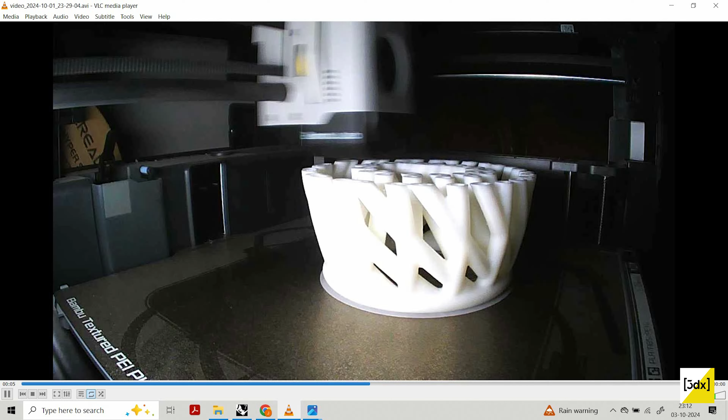In this video we are going to see how to make the structure which I 3D printed using a Bambu Lab 3D printer, which is really good. I tried it, this was my first time using this printer. It was my friend's printer, so I just tried to use it, and you can see the blade as it is, you can see the printing process time lapse. It's just a 10 second time lapse, but the quality is really good.

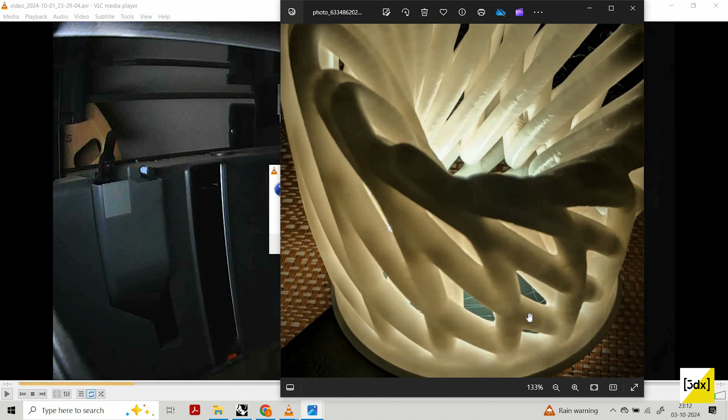So we are going to see how to make this structure in Rhino as well as Grasshopper. You can see in this model, in this photo, the curves have been interlocked. I mean the meshes have been interconnected. So we are going to see, there's a lot of ways to do it.

So in this one way we are going to see, we are going to create a structure in Rhino, and then extract the curve from the structure, then create a mesh for the curve. But instead of creating this mesh, we are going to use a plugin. You just need to go to Food4Rhino, and download this plugin called Chromodoris. This is a plugin which allows you to do ISO surfacing. ISO surfacing is a major use of this plugin, which I will show in the process of making this model, because if I just explain it in words, I think it's very difficult to understand.

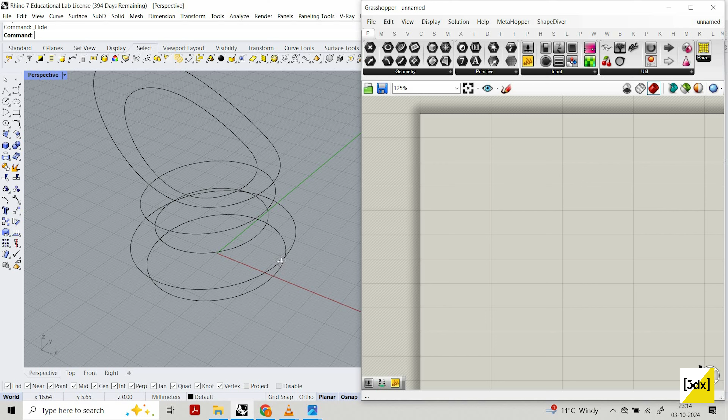So I created the curves because I recorded this video a lot of times, and it got messed up in between due to a lot of reasons. So I just keep this curve like this, and now I'm going to use this curve to create a loft.

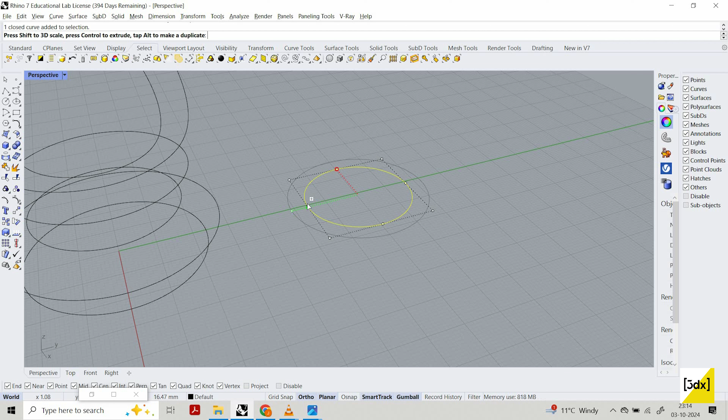Okay, if you don't know how to make this, it's so simple. Take a circle, create a curve - I mean curve is called circle - and then use Shift plus Alt, which allows you to scale, as well as Shift allows you to scale in both axes, and Alt gives a copy of it, and then you can move it. So these four circles you can do easily.

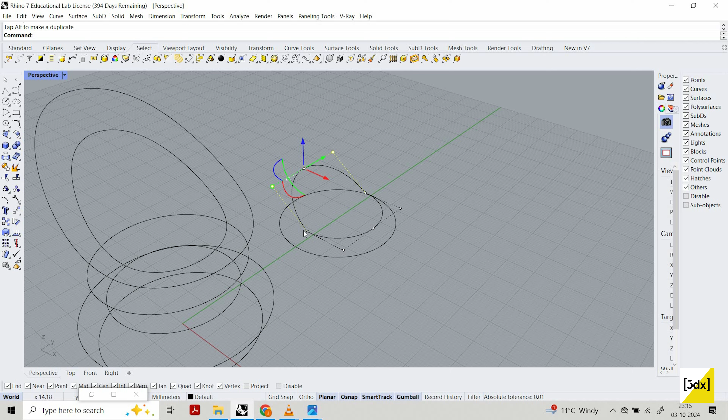But when it comes to this place, this circle is a curve which has been derived from a circle. So when I use a normal circle here, when I use the control point to move, you can see it is not like this. You might be thinking, what did I do so that this curve, when I move it, resembles this? So what I did - you can see here the curve - I mean I used to call all the 2D lines as curves, so don't mistake me. You might be thinking why this guy is calling the circle a curve.

So in this curve, if you see, I'm just going to use rebuild. In rebuild, you get an option that it rebuilds the curve instead of the fixed point. It creates a NURBS curve, where we can alter the shape with the control points freely.

And you see here, the make SubD friendly option. The model which I'm going to do, you can also do it with SubD, using SubD, but I'm not going to use SubD now. But if you want to know more about SubDs, I posted a lot of videos about this. With the same technique, you can do this model - two videos before I created a facade using a component called Bridge, with that component you can create this model. I also posted a lot of videos about Rhino basics, if you want to learn, you can learn over there.

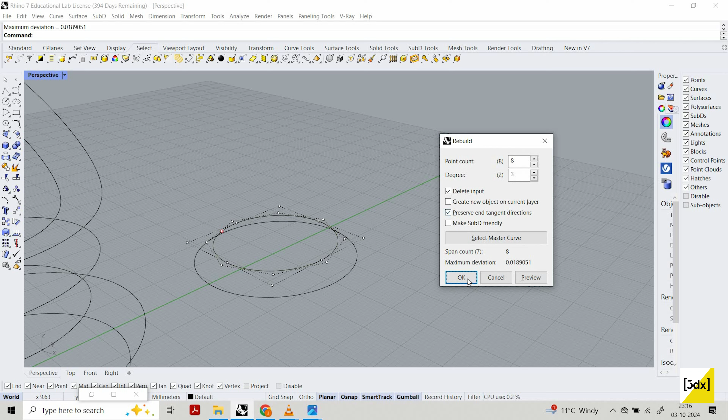So you can rebuild now, and you get 8 points. And now when you use the control point, you can see - so there is no pinch. We used to call this kind of sharp thing as a pinch.

It creates like a pinch, a sharp edge, it's not smoother. So I just rebuild the curve to make it the way I want.

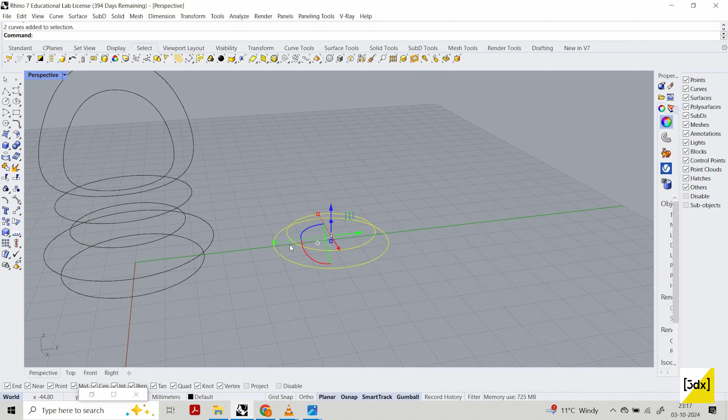So we have the curves, a set of curves. Now I'm going to give a loft over these, like 1, 2, 3, 4, 5, 6. If you look carefully, the loft create path has been created based on the selection I did, like I selected this curve first, then second. So it's based on your manual selection. Same in Grasshopper, it's based on the order of the curves you insert into the loft input parameters. So when I give it like this, it creates a shape.

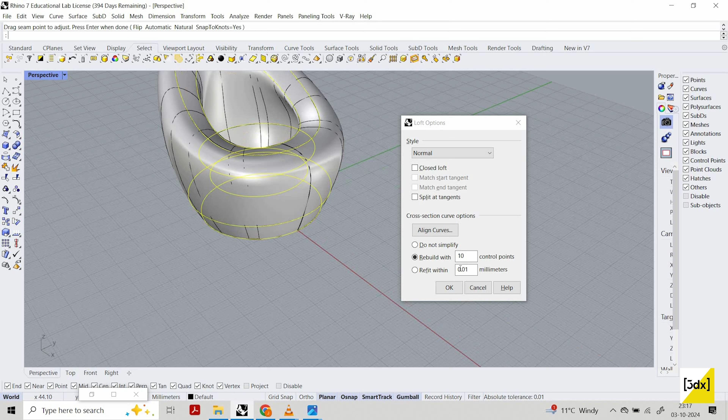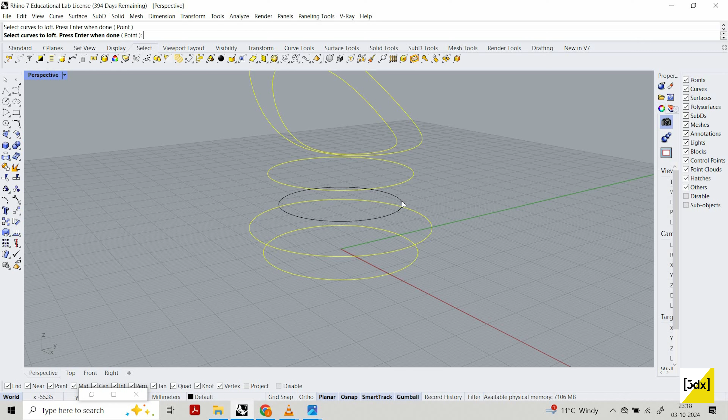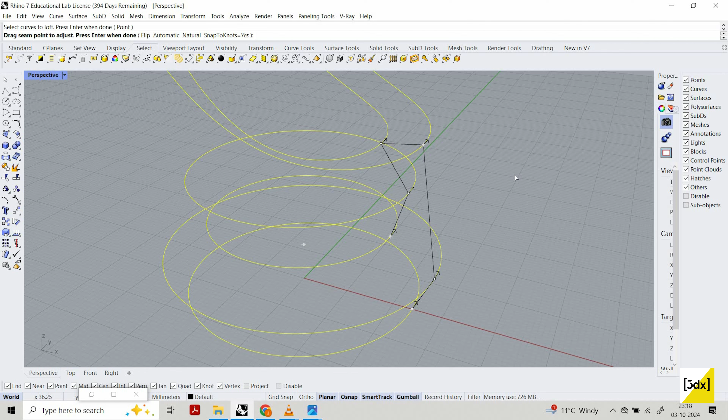This is really good, but if you see here, these are called iso curves, or a seam. So when we use a loft like this, instead of using loft, if we have the seam, it shows the seam of every curve we selected, the direction of the seam. Instead of using a loft component, you can use a polyline to trace this out, and use sweep 1 or sweep 2 component to create this. So that's one possibility. The second thing is, if you see the iso curves, they go along the way of the seam.

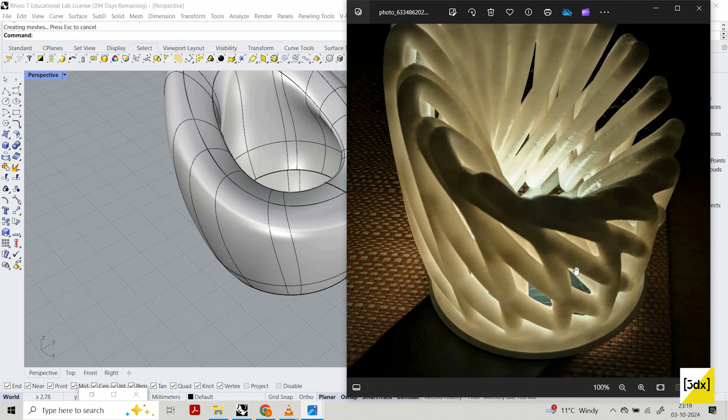But this one doesn't match over here, so I want this to be more fluid. What I can do is, in Grasshopper they used to say we get multiple options, or when we adjust some parameters, the model will be altered. In Rhino there's also an option called record history, which allows you to do the same process to a certain extent, not fully like Grasshopper.

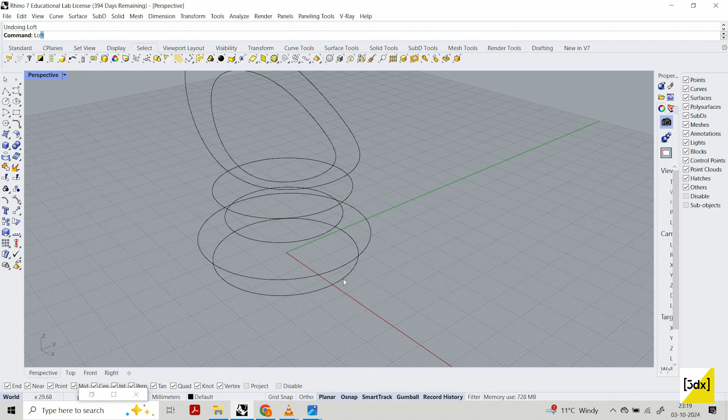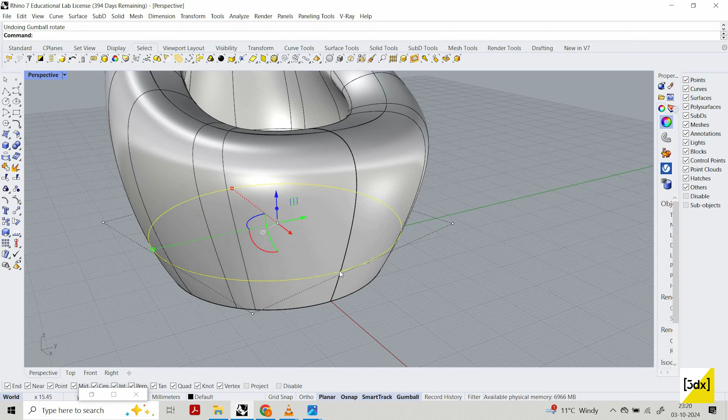So now I'm going to do loft again. I can see the loft over here, the surface is created, that's good. Now when I select the curve I used to create the surface and turn it, you can see the surface seam has turned out. The seam has changed based on the curve, because according to this surface, the seam is over here, like a dark line. So all the seam points are over here, and when I move it, I'm altering the seam point, so all the iso curves have been altered.

So I'm going to do this for every other curve.

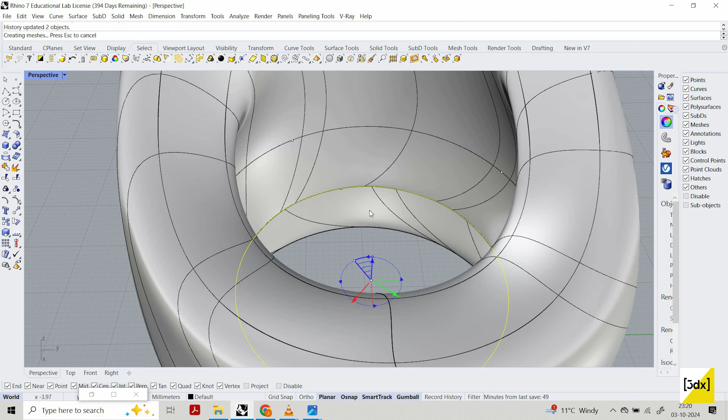So you can alter it based on your needs.

I'm just trying to tell you about the process behind the creation of the model. You just need to understand the process, and you can create your own model, your own concept. You can also create a better model than what I create, with better ideas. So it's just a step-by-step understanding of each and every process.

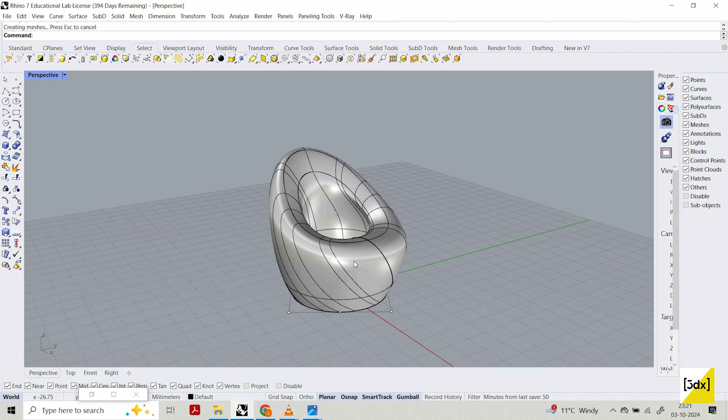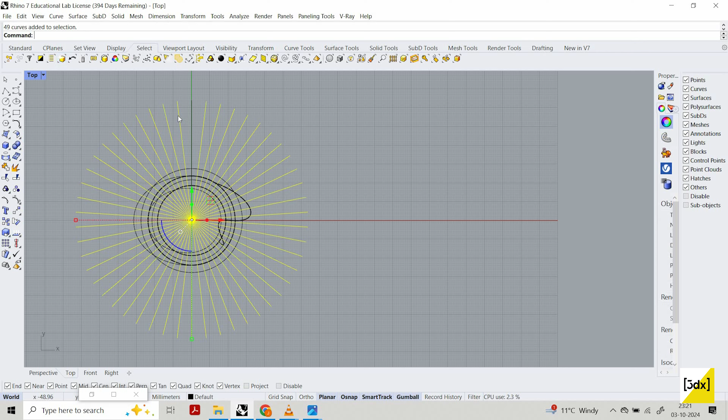So now we got this. In Rhino, usually what you can do is use a line here, then use polar array, then select last created, then move this curve, then project.

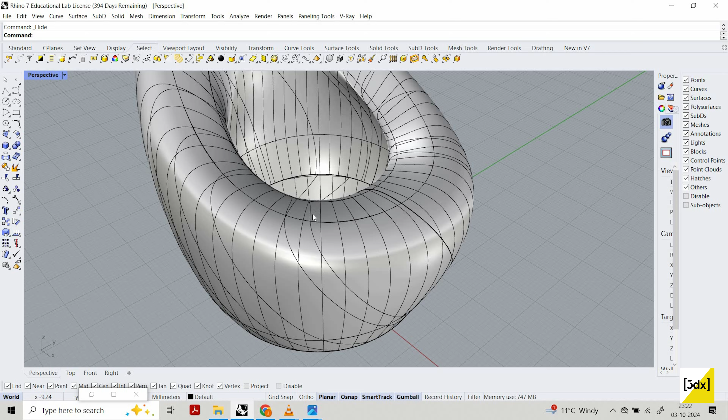So you can see when I do this, the curve is projected directly onto the surface, which is good, but it doesn't follow the iso curve. The curve we really want is a curve like this one.

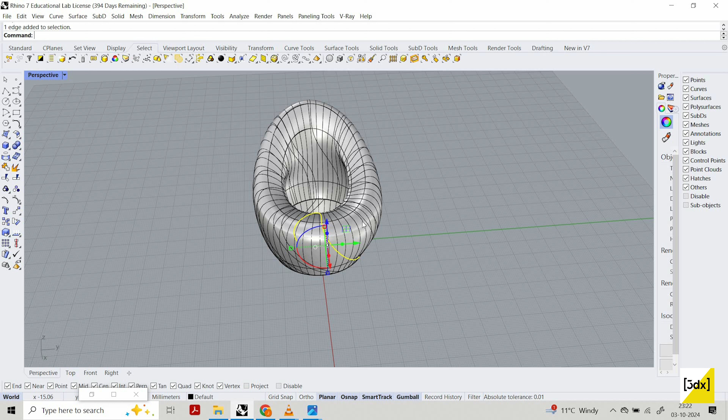Sorry. So the curve which we really want is this curve to be created all over the surface, like a contour, but in this axis. When you use a contour command, it creates a contour. If it's a flat surface, it's okay. If you use contour over here also, it creates a flat one. But in this case, like a NURBS curve, you want not a regular curve. So how do we create this kind of curves all over the surface?

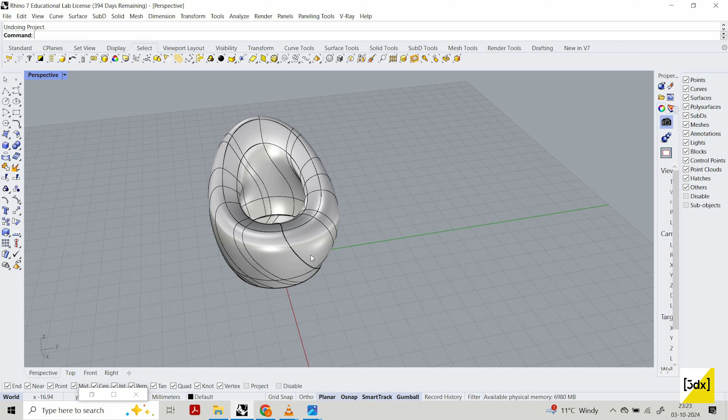In this case, I'll use Grasshopper, which I felt more comfortable with. There are processes to do the same in Rhino as well, but I use Grasshopper. My working style is I do certain things in Rhino and certain things in Grasshopper. Some things are easier in Rhino, some are easier in Grasshopper. You just need to blend the workflow.

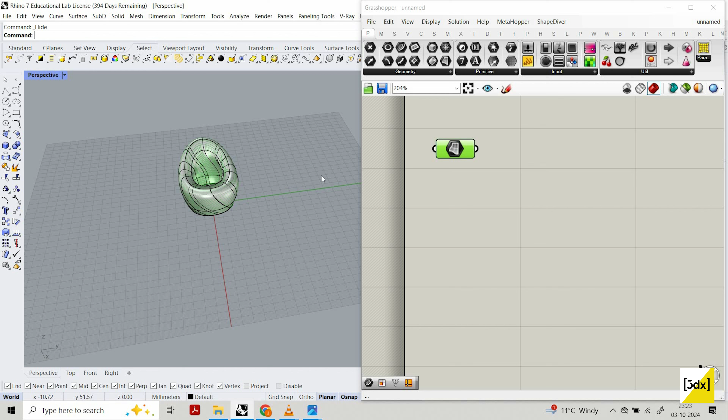So I'm going to use ISO curve over here. ISO curve takes a surface and uses the UV point to create the curve. So we need to create the UV point between 0 to 1, and we need to make this value recognizable with the surface. For that we are going to reparameterize this surface.

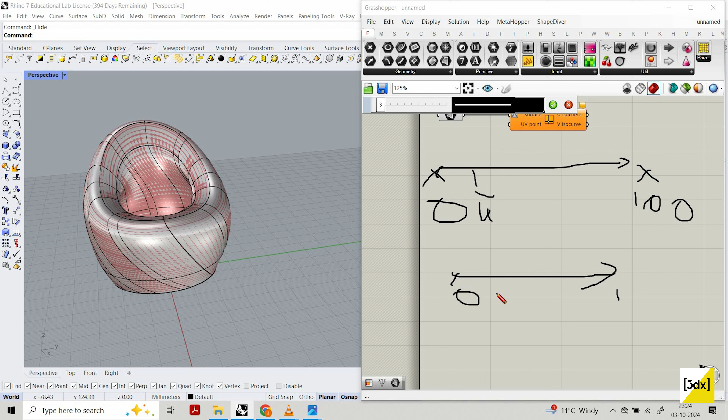Reparameterize is nothing but normalization. So if you have values from 0 to 100, they will be reparameterized to 0 to 1. If here it's 10, then here it's 0.1. If it's 20, then 0.2. 30, 0.3. Whatever value it has, it will be converted into the 0 to 1 domain.

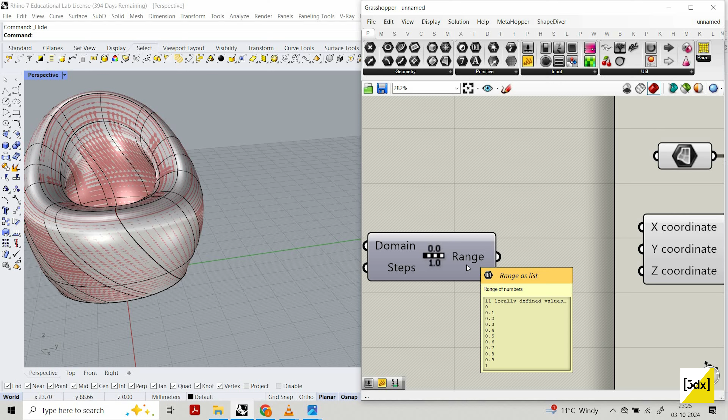Now we are going to use construct point, and now we are going to use range. In this range, the domain is 0 to 1. By default it has 10, but I'm also giving 10. So it creates values of 0.1, 0.2, 0.3. Now I'm creating the point on the y-axis, and when I connect it, you don't see anything. Yeah, but okay. I just move this like this.

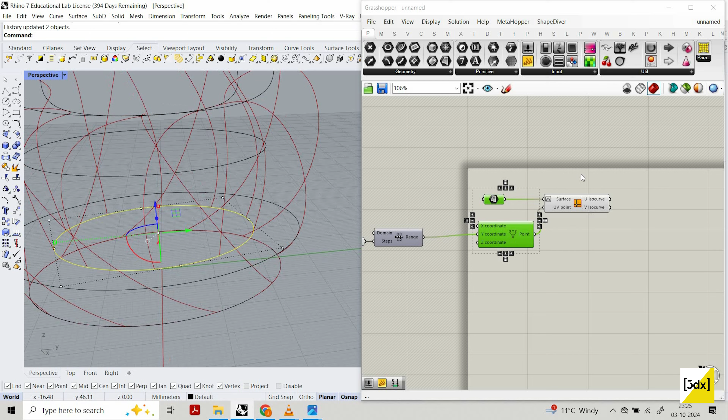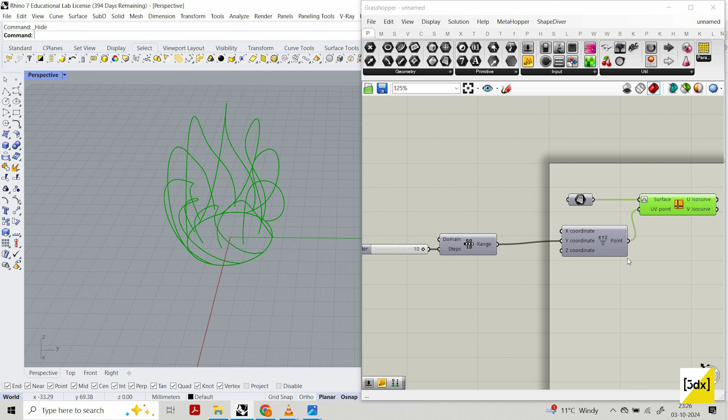When I select the ISO curve, you can see the curves are being created based on the seam of the surface. Let's hide this. This ISO curve process is used when you print non-planar 3D printing. If you want to create a curve on a non-planar surface, or a non-planar tool path for 3D printing, then ISO curve is the best option for that. You can increase the value from 10.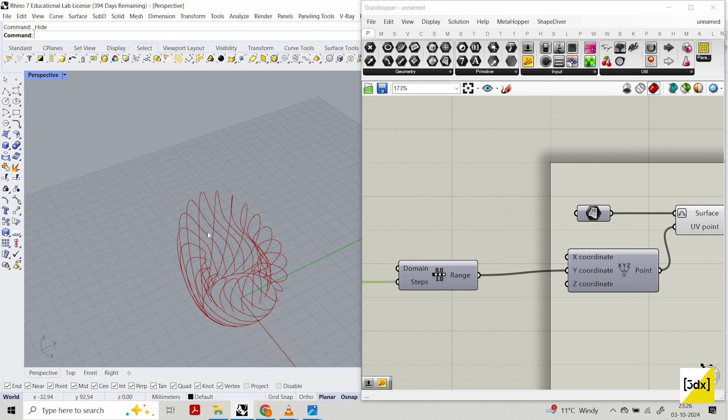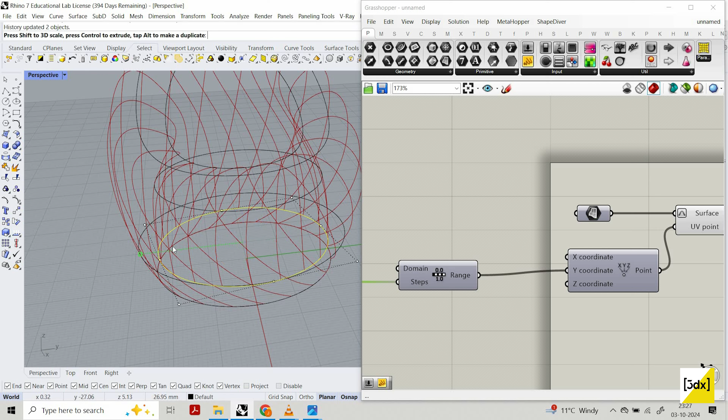In my keyboard my delete option is not working, so I'm not deleting it. So you get around 20 curves based on the seam. What I'm going to do is hide the surface and use this curve to edit it, because the record history is still on. Sorry. I'm going to hide this now. You can see the record history is still on, so I can edit it; this way it's easier to visualize what is there and what is needed. So now we got this curve.

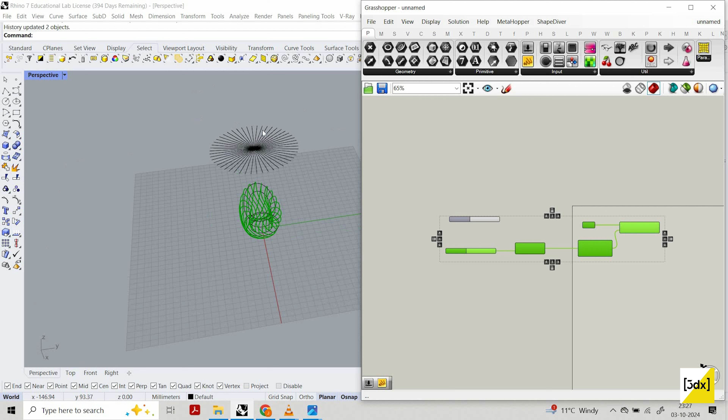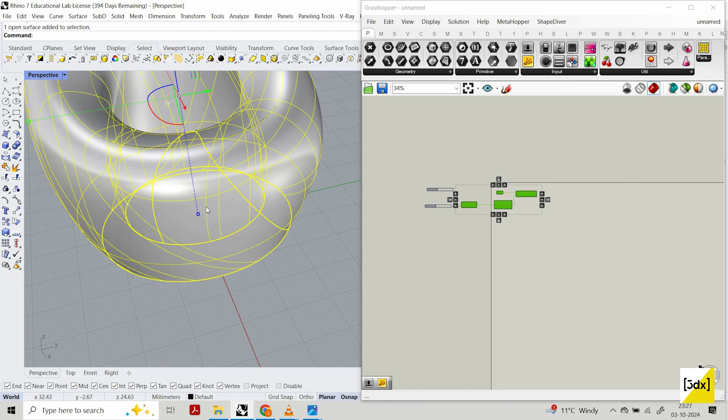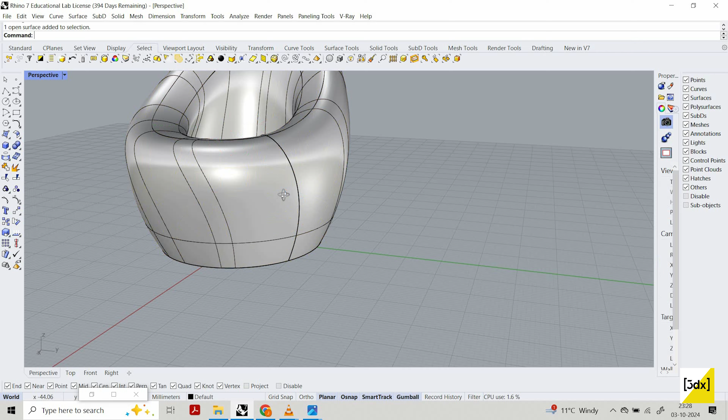Let's keep it aside, okay? Now I just internalize this and I'm going to hide this. The one I created, I'm going to delete it, as I said before, because my delete key is not working, I don't know why. Now I'm going to create the loft again. Turn the record history on again. Okay. You can see the seam is over here. I'm going to use the same process.

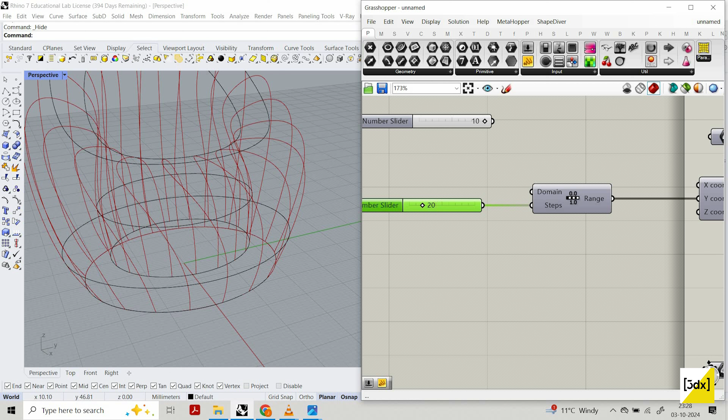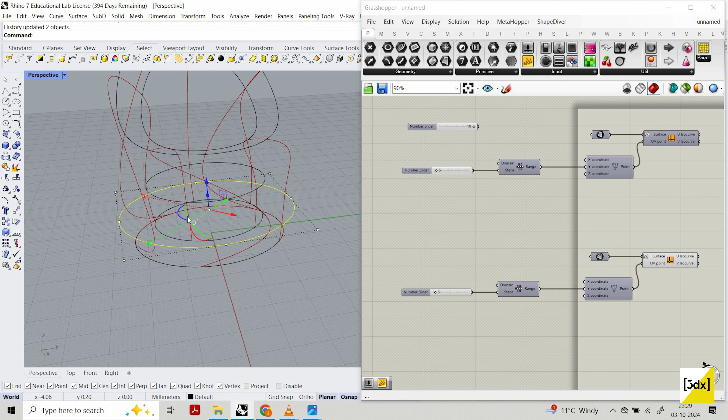Set one surface. Let's hide this for now. For now I just keep 5 here to see the formation of the curves properly, as well as 5 here. Now I'm going to move this. It's so cool. You can move the seam however you want. You can also alter the seam based on your needs. Okay. And I'm going to use 20. Let's hide this for now. So now we have 2 sets of curves.

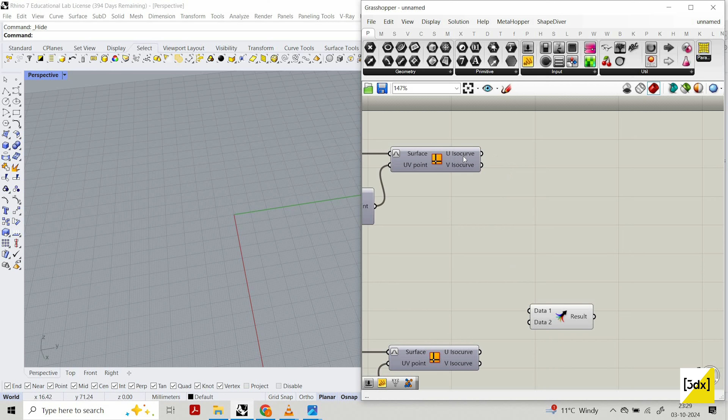So you can see one curve we created is going from here. The other curve is going like this, for example, one curve is like this, the other curve is going like this. Technically, you can also create this entirely in Grasshopper, but I just want to show the interface between both the elements.

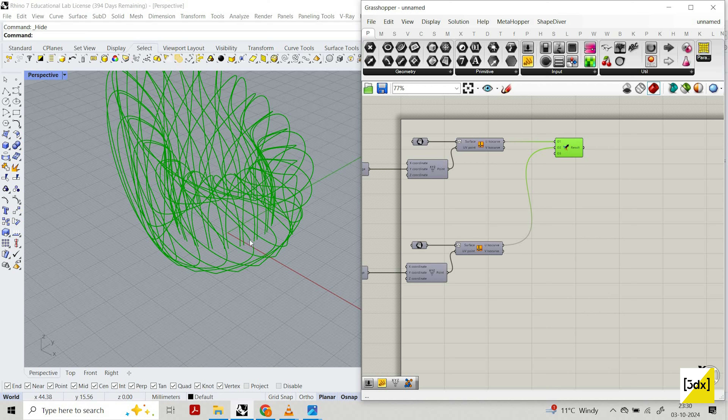Sometimes I like to edit my model manually in Rhino, so at this time I use Rhino. It's up to your thought process, okay? I'm just trying to teach you the concept behind this. So now I got the curves.

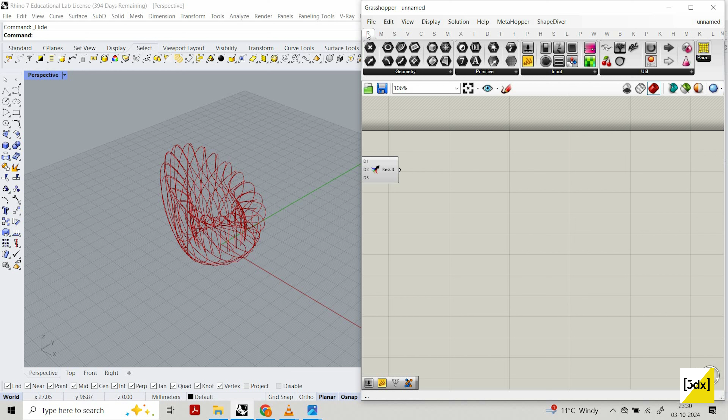Now I am going to do, where is the component? Yeah, here it is. So let's take this, okay? Now I'm going to divide it. I'm going to divide the curve based on the length of the curve. So let's take the length and let's divide, let's say x by 2. So whatever length it has, that number by 2.

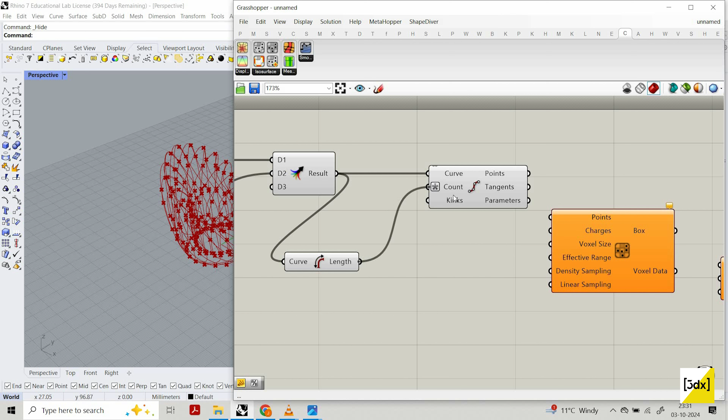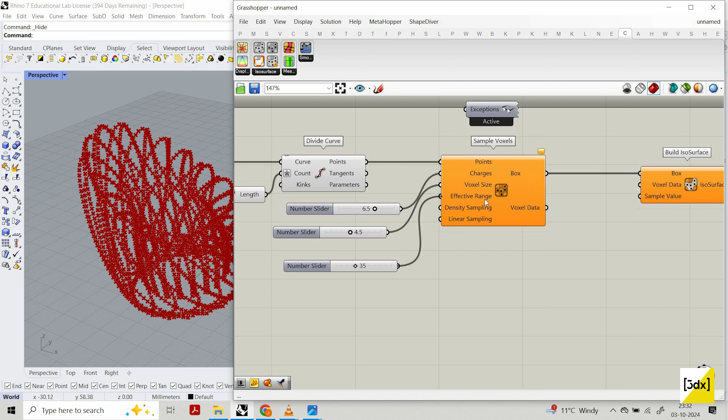So I'll just give a random value of 6.5 and 4.5 and 35. So now you see it looks like a bounding box. Okay. Now I'm going to flatten this, so it's like a single box.

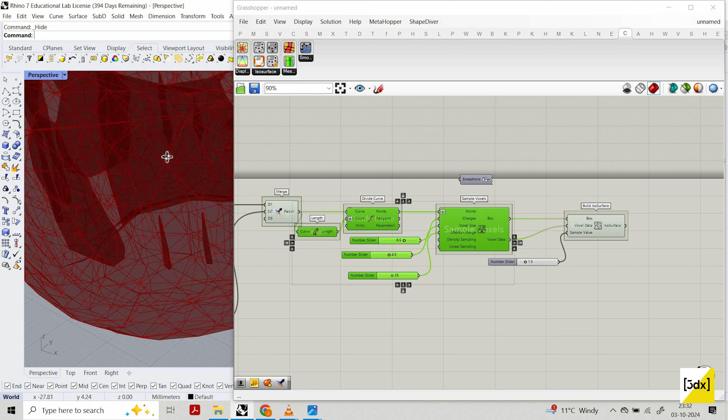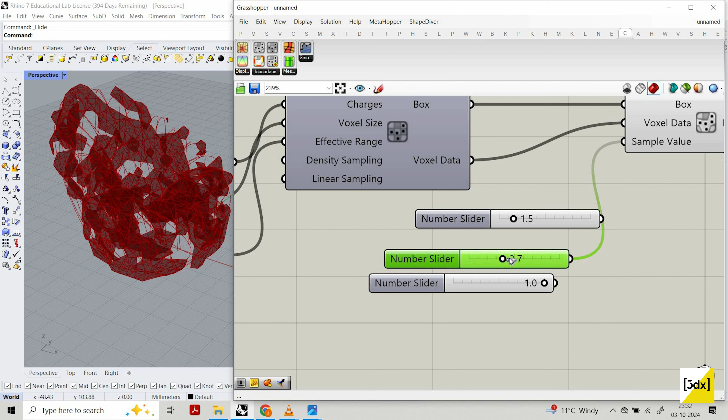Now I'm going to use this voxel data here. I'm going to use 1.5. So you see a big voxel. Now I'm going to do 0.5 maybe. So 2.5. So here the voxel is being connected. Now I'll just increase the point, I'm just playing around. So technically what it is doing is with every point.

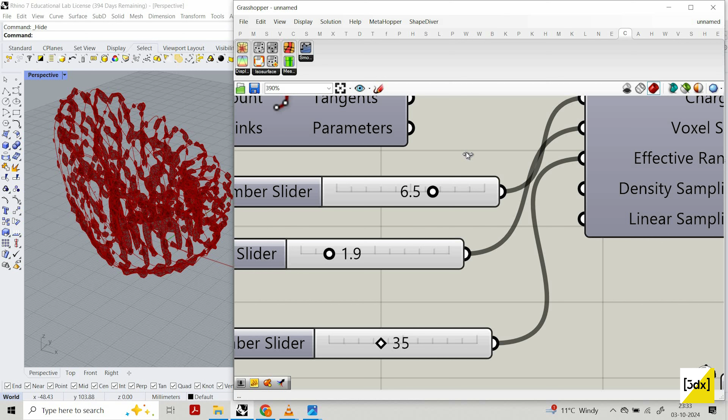Just a minute, my laptop is hanged. I should have explained first before doing it, but I thought first visually. So yeah, now I can move my mouse.

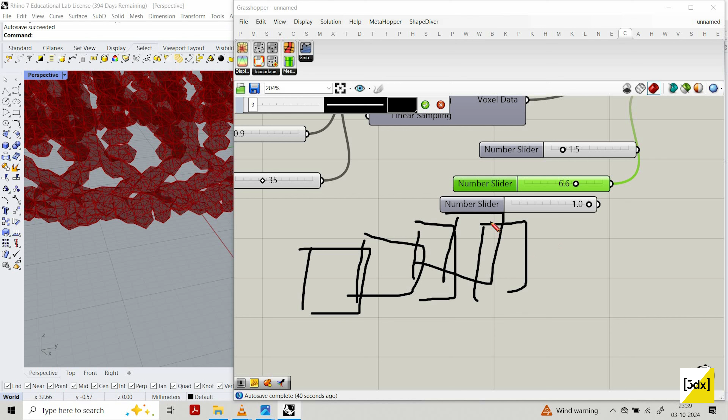So you can see this sample voxel, we are using the point, for example like a pixel. So if there is one box, this generates a box, the voxel. Just imagine voxel as a box for now. So it generates a box. And this one, Build IsoSurface, combines all the boxes and creates a surface. So this is more helpful when you want to model something like this.

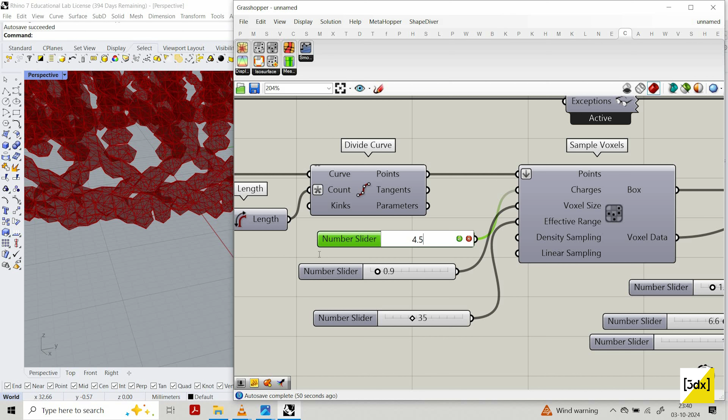It takes more time. I'll try to get a value where I can achieve the final output. Maybe I can compute. Just wait a second. It takes some time, I'm so sorry. Yes, I'll edit this part. Okay, so now it's been loaded.

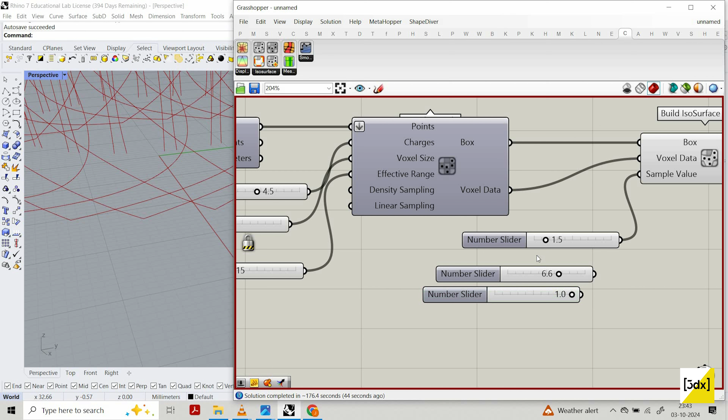So let's lock it. Let's give a value 1.5, 15. I'm just using the value from the old model which I did because I don't want to waste your time. In the recording it takes more time because my laptop is not that powerful.

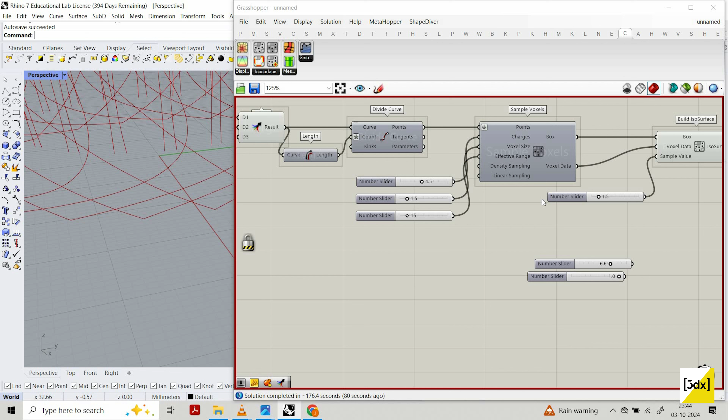So for example you can create your own simulation, you can create a random curve and you can voxel this. There are a lot of other plugins, but I feel this one is a little more interesting and clean with the mesh, especially for 3D printing. The mesh it provides was really suitable for 3D printing. So I like the output, that's why I'm using this. You can also give this plugin a try and, if possible, share with me the crazy models which you create.

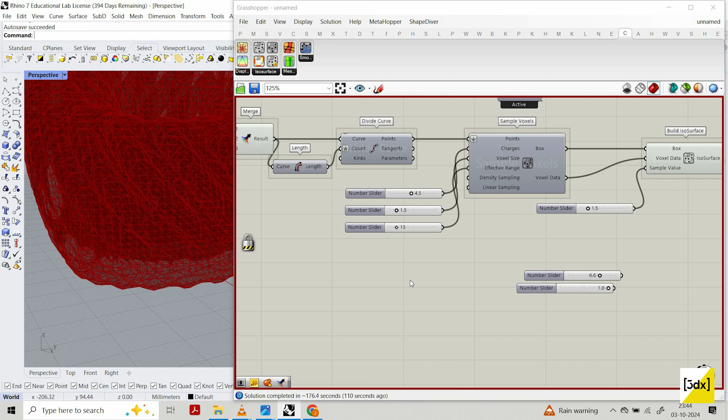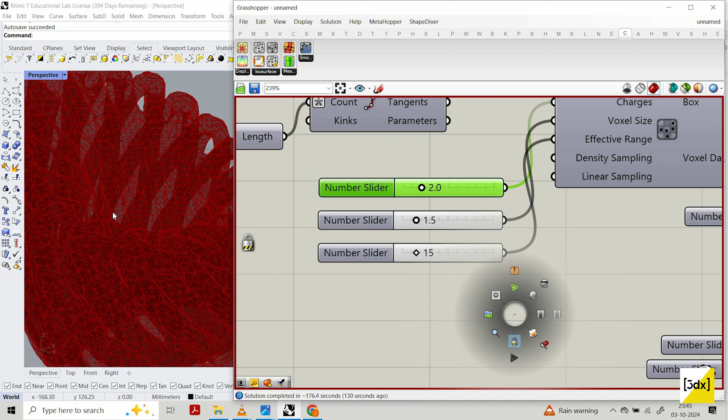So let's try to compute. Okay. Not bad, but I want some gaps. So what I'm going to do is, let's say, my keyboard is not working a lot of times, 3.5. Let's try to compute it. It's too much. Maybe 2.5. Compute it. 3. So I computed.

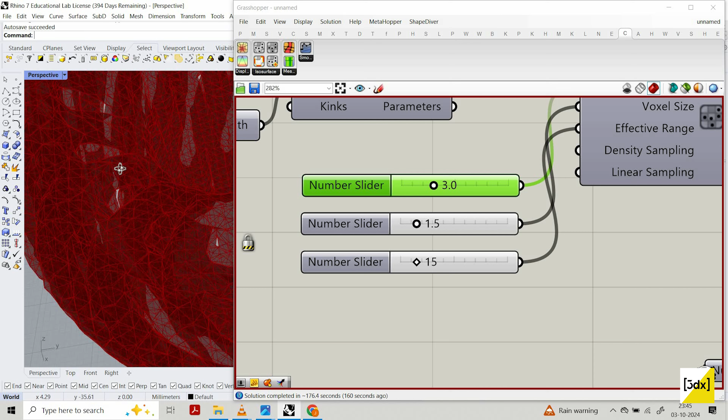Okay, not bad. Okay, so now what I'm going to do is I'm going to use smooth mesh. I'm going to use this over here, and then I'm going to use Catmull. So Catmull, if you don't find it, it's a plugin, another plugin called Weaverbird. So you just need to, but smooth mesh is like

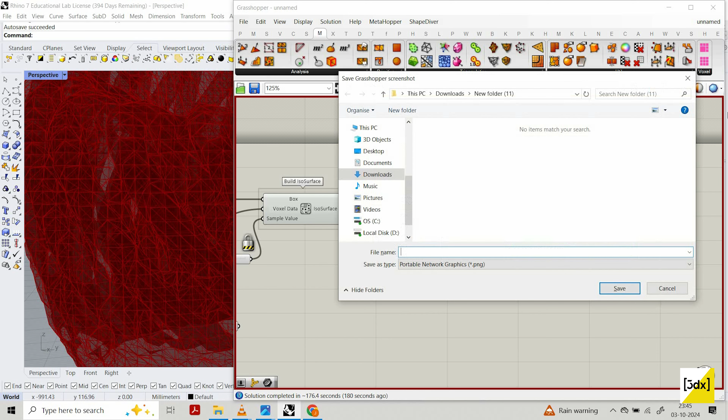Sorry. So if you go into mesh, you will find it in utilities, like smooth mesh. And if you don't know how I did it, Control plus Alt, and then press the component, you will know where the component is placed in the above toolbar. So now I just need to connect this mesh over here.

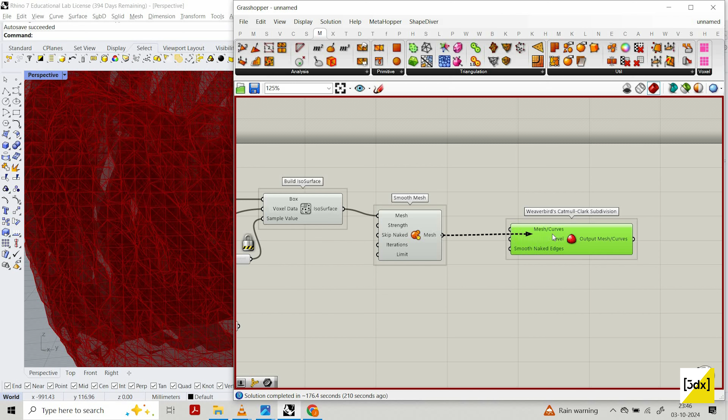Let's hide everything. So technically what I'm doing is I'm just pausing the solver, doing the changes. So when I move, it won't be running. It will be paused. So I just manually need to enable the compute. So I change it, I recompute. I change it, I recompute. So in this case, it's so helpful.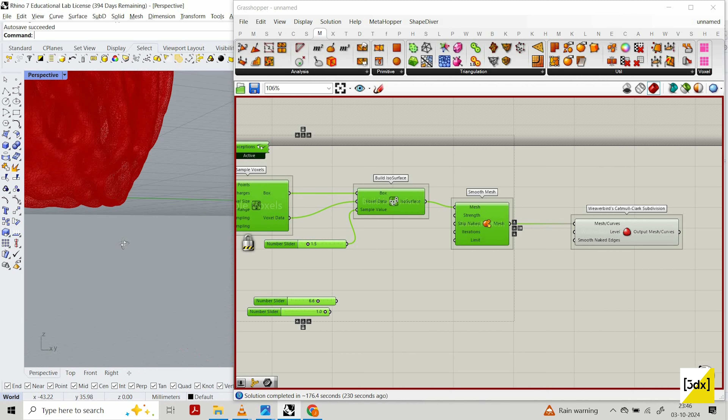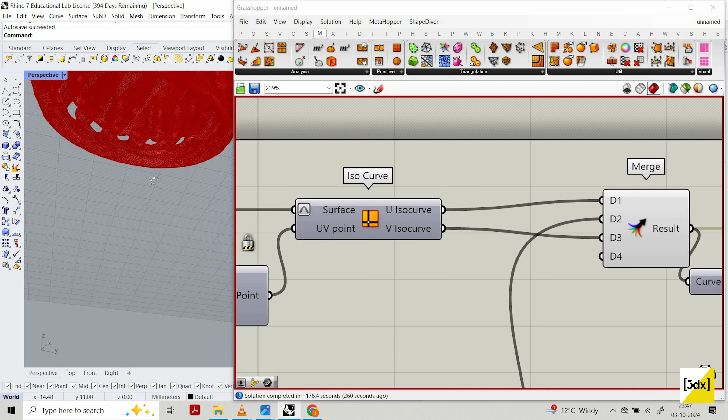So now we got not exactly the same, but it's not that bad. But at the same time, I just want the curve. I just recompute it. So it creates a bottom. You can see here, it creates a bottom. Okay. If you want, you can also add this over here. Recompute. So in this case, when I'm moving, the component is not processing, so I can move freely.

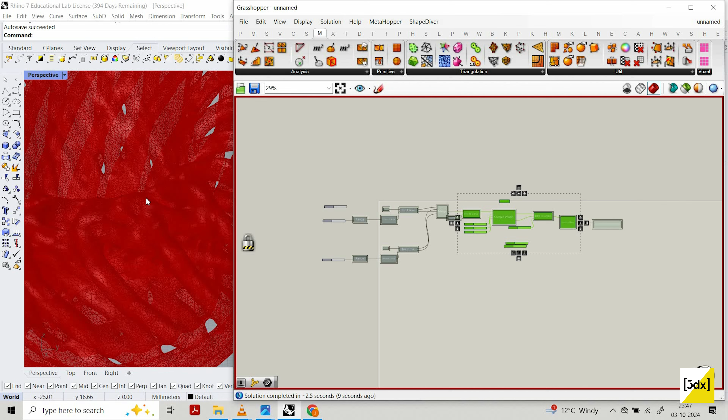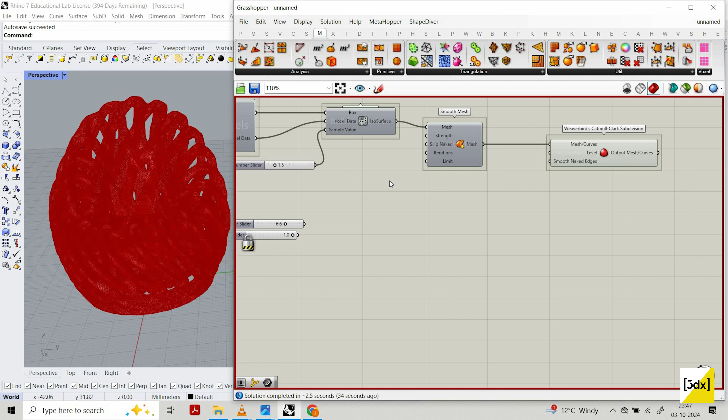But when you don't do this, sometimes the mesh rendering or the process running in the background makes your system slower. So when I work on a script which fills the entire screen, I just use this process because after some time, even if it doesn't have that much data trees, or even if you are cleaning everything, it has a lot of components, it has a lot of processing. So I always manually recompute it. That's my approach. A lot of people used to do this. You can also try it and let me know.

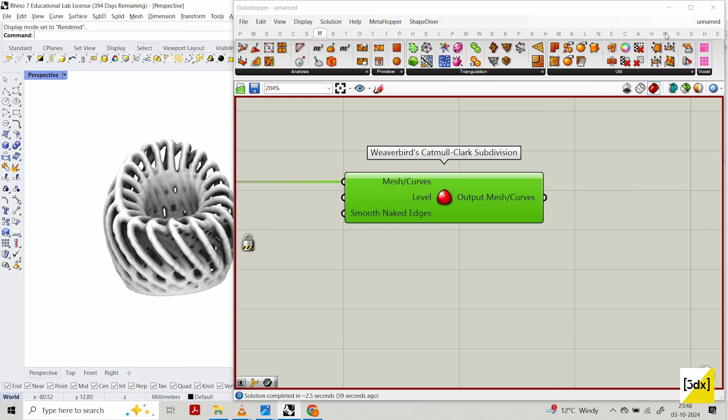So now let's try to bake it. Bake. So okay. Let's see. Okay, so this is the model which we created. What do you think about this? I like it, but I don't know about your opinion. This is not the same as what I created, but it looks better for me.

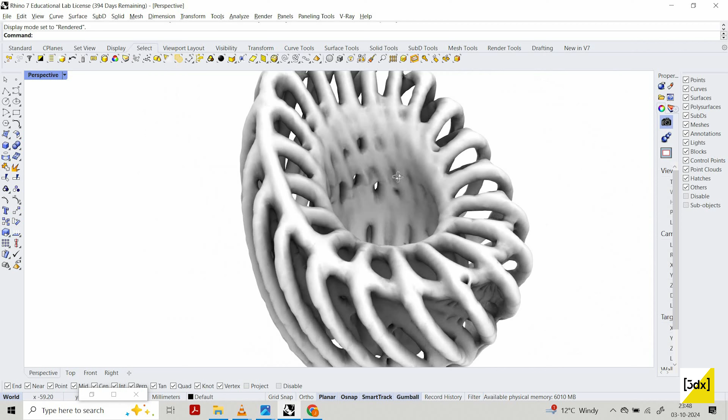So you can also close the bottom. If you want to keep it as a pen stand, then you just create a surface over here, and then you can connect it with the mesh. So after this, what you need to do is select the mesh file, export selected, and save as STL. It is STL.

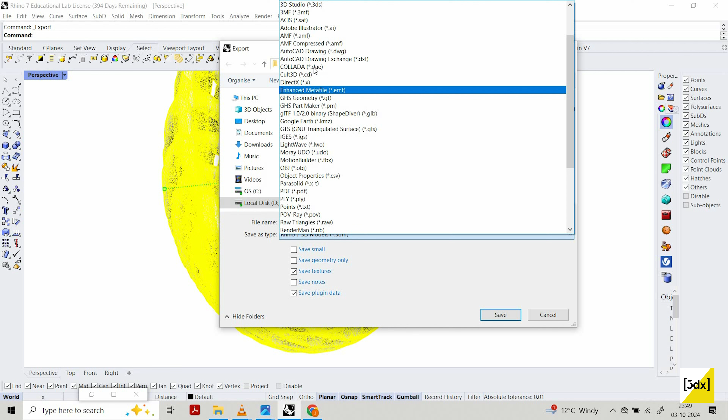Yeah. So with this STL file, you just need to drop this file into a slicer, like a slicer called Cura, or Simplify3D, or there are some other slicers in the market. Simplify3D is a little more expensive. For the starter, you can use Cura. So you just need to explore. It's very simple. You'll learn it step by step as you use it. That's the way I used to learn. Okay.